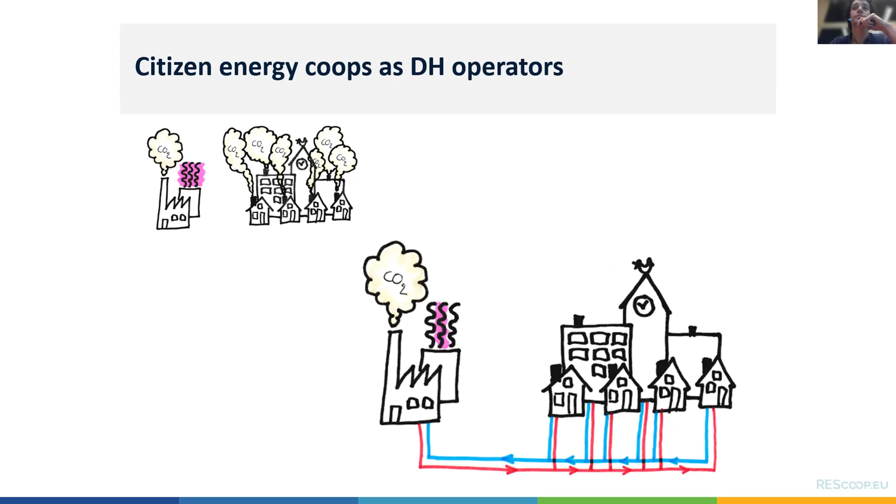I told you that there is this new cooperative, the Mobility Factory, and Partago, who developed an app to share an electric car, and this is European. So if you gather with some citizens in a neighborhood, you can be supported by the Mobility Factory to access this app, to access the services, and then to share an electric car with your neighbors.

And finally, I also told you that now some citizen energy cooperatives identify that at local level it's sometimes difficult to access funding, and so they are gathering to set up a new fund called MECISE. This is also a Horizon 2020 project, and the idea would be to access a 700 million euro fund to support the deployment of citizen energy cooperative projects. So we are really talking about a new paradigm. It's not a small movement, it's a European movement, and they are active in all the activities of the energy market, and they are developing tools to reach this objective.

So about the energy cooperative movement, I hope you understood that it's more a social concept. It's a way to organize. It's a way for citizens with public authorities and SMEs to reappropriate and own the electricity or the energy. It's a new way to collaborate, to cooperate instead of compete. And it's kind of neutral regarding the activity, because as you could see, there are citizen energy cooperatives active in all the activity sectors of the energy market.

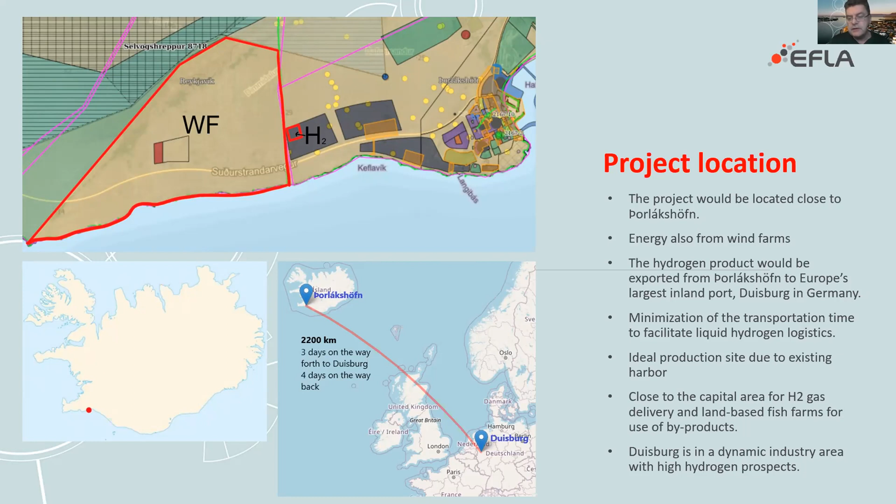And as you may see, that boat has to cross the North Atlantic, but also be able to go up the river. And that is especially of interest because hydrogen as a liquid material is not heavy. So the boat is not going deep down into the river. So we set up this scenario. We have the factory near to the harbor.

We produce hydrogen from electricity from the grid as well as from nearby wind parks, and we convert the hydrogen into liquid form and export it in containers, as I said. We have byproducts here from this factory. We have oxygen, of course, because we are producing a lot of oxygen. And the oxygen will go to the nearby fish farms.

And that is very interesting because in this area of Iceland, we see now big growth in land-based fish farms, salmon farms. And we have also the rest heat from the electrolyzers we could use to heat up the seawater up to the optimal temperature for the fish to grow.

And not less important, if we are producing hydrogen in a large scale, then we are also able to deliver hydrogen in form of gas to the capital city, Reykjavik. It's only 30 kilometers away. And so we could service fuel stations there with gas under pressure.

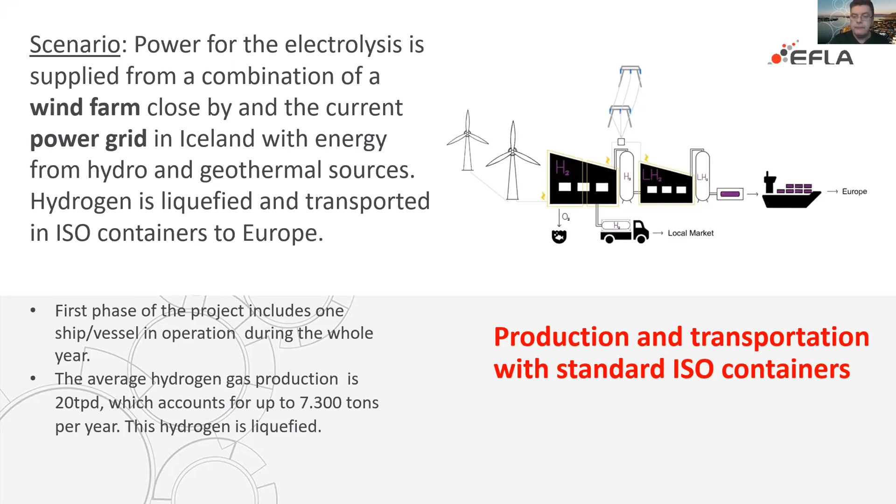So we know, of course, that it costs a lot of energy to turn hydrogen in gas form to a liquid form. And it is approximately 8.5 kilowatt hours per kilogram of hydrogen. But as I said before, the beauty is that a cubic meter of liquid hydrogen weighs only 71 kilos. And we know also from this project and other projects we have been working on that the economy of scale in this business is very important.

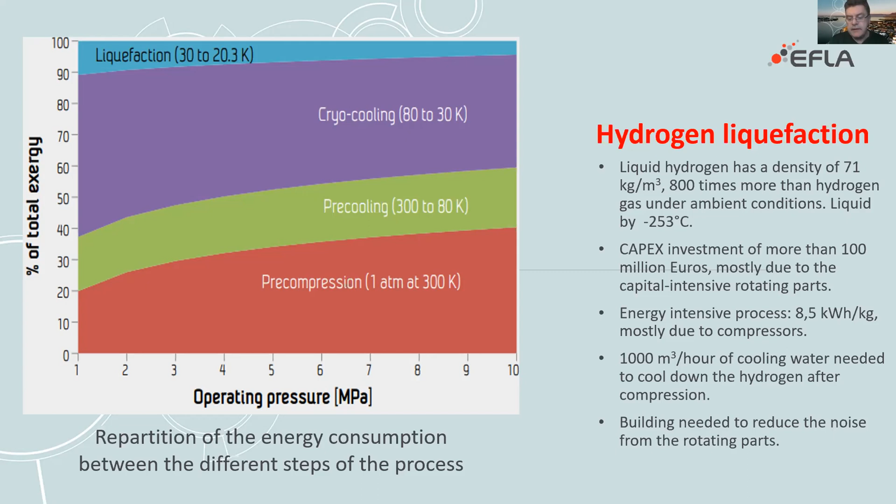So in this project, we decided to cooperate very closely with the US company Chart Industries. They are also active in Europe. And they are operating factories in Europe also for technical systems. And as I said, we use the standard ISO container produced by Chart Industries.

And we could put in 3.2 tons of liquid hydrogen per container, and the empty weight of such a container is around 13 tons. And the vessel could take 110 containers per delivery.

You can see those systems on those photos on the left side, the containers, the main production unit for the liquefaction on the photo in the middle, and land-based stationary storage tanks on the photo below that, tanks lying horizontally. And so the vessel will take full containers to the port of Duisburg. There, those containers will go to 3 off-takers.

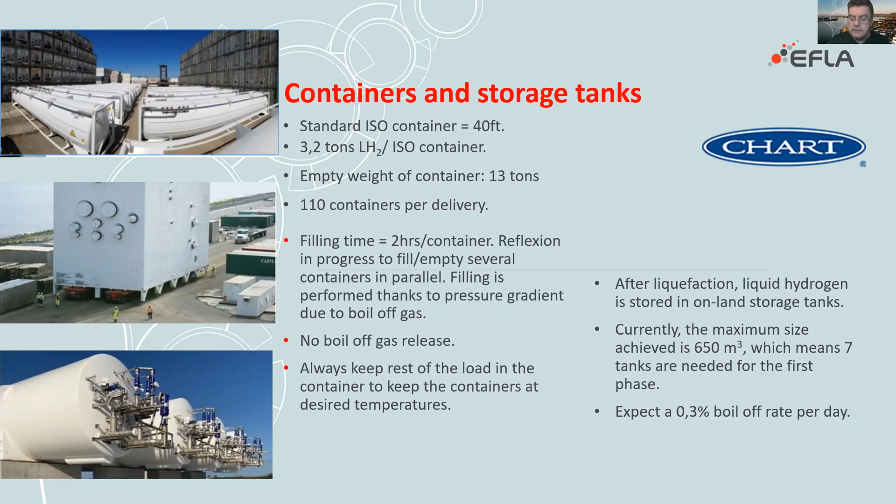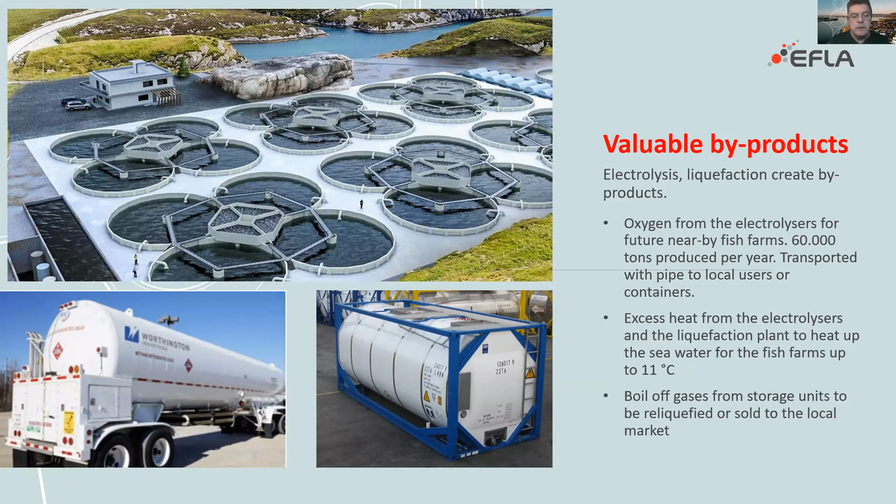As I said, the oxygen in liquid form or in a form of gas via pipeline will go to the nearby fish farms, and no boil-off gas will be released. So in this case, we calculate everything for 8 wind turbines, and the rest of the energy came from the grid. And we calculated this for alkaline and PEM electrolyzers, total yearly production of around 7,000 tons.

And it's very interesting to look at how much you can get for the byproducts if the market is going to behave like until now. So it's around 4.9 million euros per year. But if we take a look at the chart, you can see that the investment for the wind farm is approximately 19% of the total capex in this case. The hydrogen factory, around 20%.

Liquefaction plant, more than 100 million euros. And the transportation, logistic cost, the vessel is in this, and the containers, they are very expensive. It's around 26.6%.

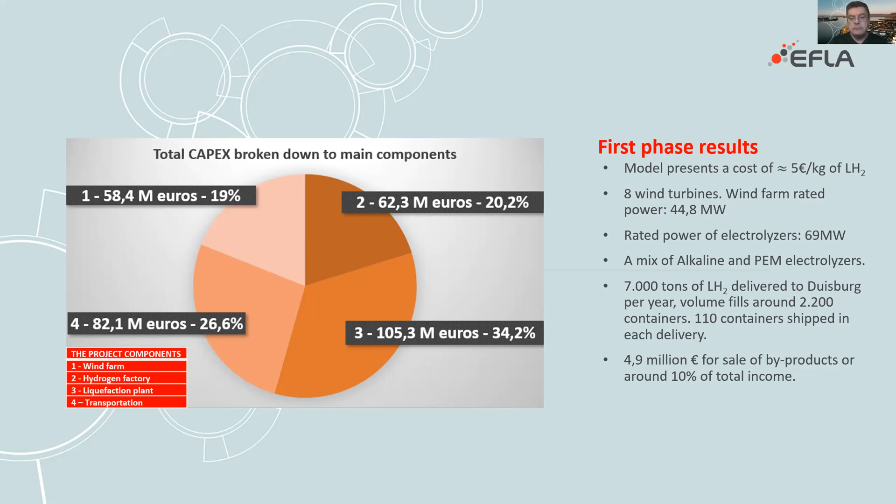So we have found out that those positions number 3 and 4 can be optimized, and we are now going to step into some kind of optimization of those two parts, and we do hope that we can take the price of the hydrogen very much down.

Here in Iceland, we have been working on a project called the Finnafjord project in the northeast of Iceland, where we are going to have a new industrial site, and here we will have large-scale hydrogen production in the future. There are even today companies looking into the Finnafjord site as the ideal site for this production, liquid hydrogen or ammonia.

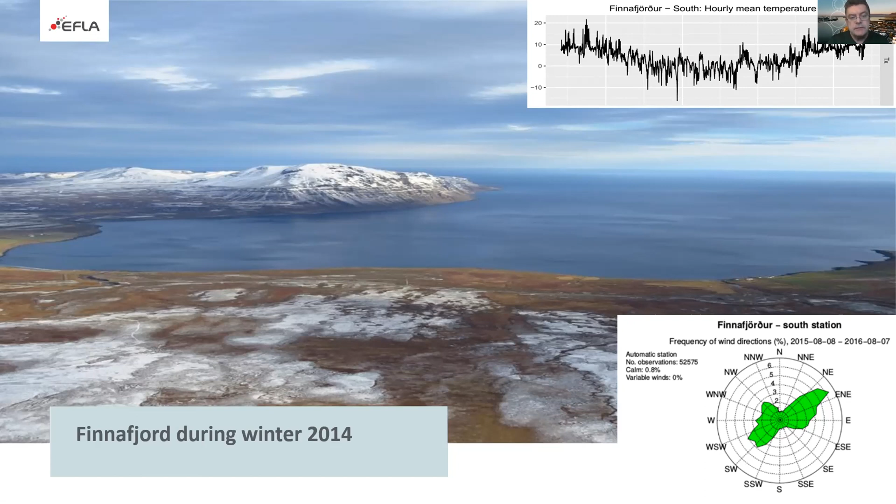It is flat land, no rock to blast. You can almost start your construction work at site, and the sea is deep, so port development is easy there. That is one of the points those companies we are discussing with are very much interested in regarding this site.

So if we conclude a little bit, we can see that this is really a business case. We have to face the fact that the technology is almost there, but not fully there.

For instance, this vessel I'm talking about - we cannot see a vessel of this kind on the seas today, but all the parts we need are developed. So there is a need for a special design of this vessel for this transportation. We also see that there is a need for a gigawatt plant to take the prices down, and the whole logistic chain must be optimized - the vessel itself, the tanks, etc.

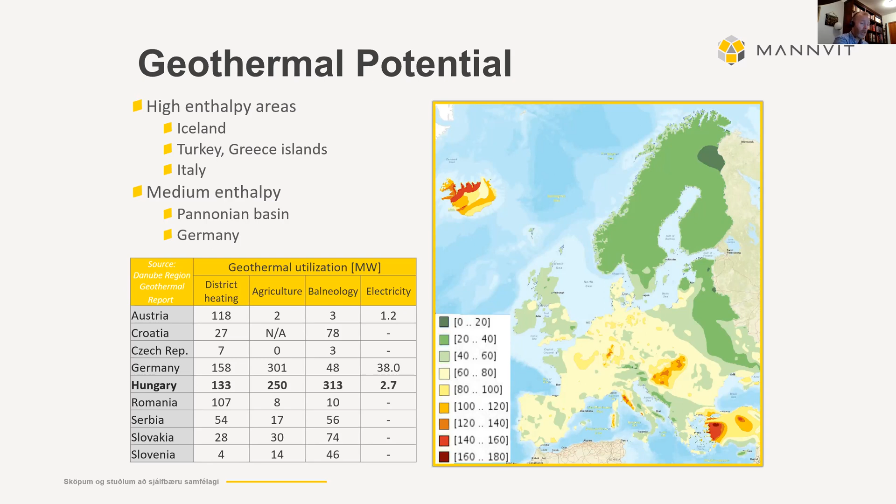Our company in Hungary was established in 2007. It started working on geothermal projects in Central and Eastern Europe, and also in general tried to access the green energy market in this area.

This area, the Balkans and Hungary, Romania - these areas have huge possibilities in producing energy in an environmentally friendly manner. In Hungary, they have the Pannonian Basin, which is a huge resource of energy underground, and also huge possibilities in solar energy. The Balkans have a huge possibility in hydropower, and also some possibilities in wind.

But the further you go to Croatia and in that direction, the less you have in possibilities for geothermal. But in many countries in this area, you have geothermal possibilities, although they are maybe on a bigger scale in Hungary, and also when you go further south, all the way to Greece and Turkey, there are also huge possibilities. We have developed this company to work in this area - just as an example of projects we have been working on.

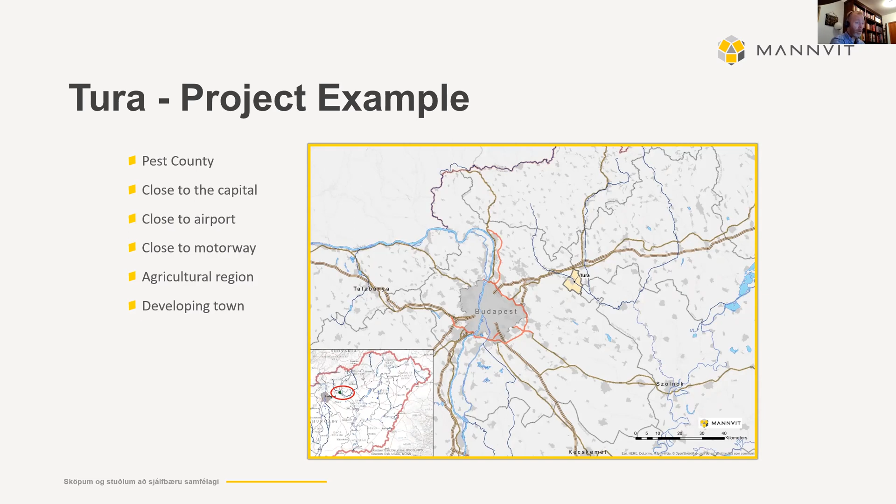It's a power plant that gets the geothermal fluid from wells, about 2,000 meter wells, with temperature around 120 to 130 degrees. This is put into turbines using the so-called ORC technique, with two steps of turbines, and the production of electricity is through these turbines, with the waste heat from electrical production used to heat houses in the area.

So the utilization of the energy in the ground in this case is optimum, we could say. It's both used - the higher temperature water is used for electricity production, but the lower end for heating houses. This is a good way of doing things. Then the fluid which comes from the houses is re-injected into the reservoir, so the rest heat which has not been utilized is put into the ground again.

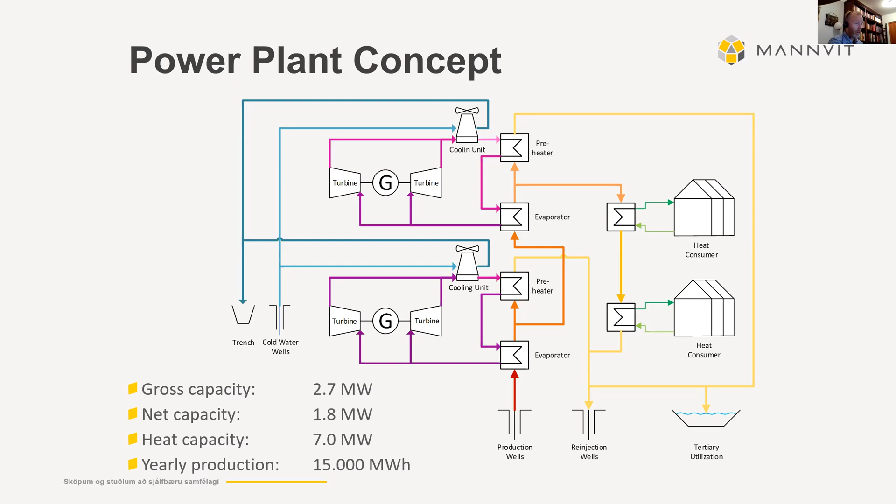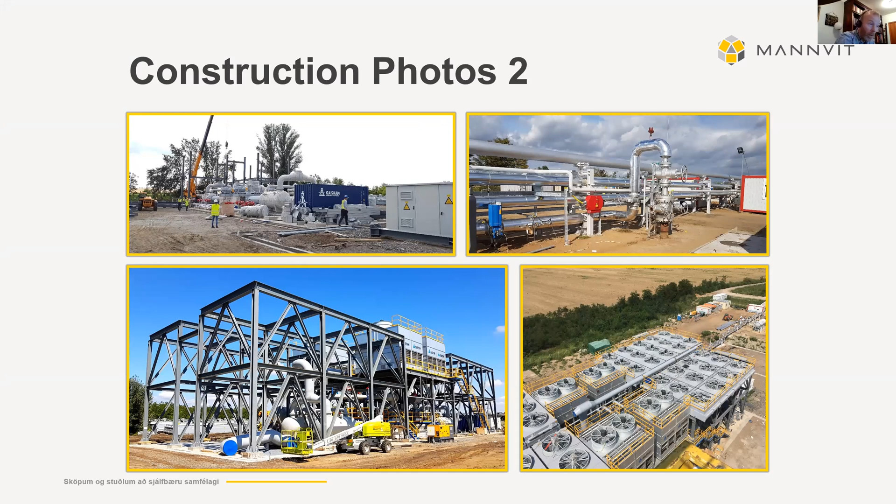These are just some pictures from the site when it was in construction, and this is the plant as it looks today. It's on a huge field that is mainly agricultural, and the factory doesn't take too much space - it's rather compact and connects well to the neighboring area. Although there's a large field, it's also near to consumers.

So it's a successful project, funded by private money, which has proved to be a good investment.

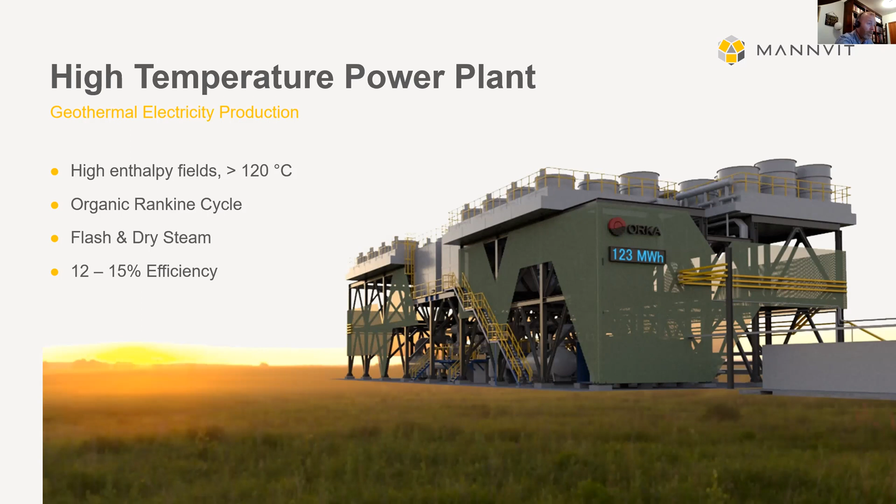We are also now working, in the early phases, on a project of heating Budapest by use of geothermal. Here we are using the experience in Reykjavik - as you may know, Reykjavik is more or less heated by geothermal. And there are huge possibilities in the Budapest area to use geothermal to a much greater extent.

Until recently, the authorities in and around Budapest have been very much against using geothermal for space heating. This is because the culture in the Budapest area and in Hungary in general is much related to spa use of geothermal, and there's a lot of tourism in Budapest relying on spas and some medical use of geothermal fluid.

But researchers and institutions have been investigating the possibilities of geothermal use in Budapest, and the result is that taking from the reservoir in the Budapest area will not affect the use of geothermal in the spa part, which they were afraid of. So this is a very promising project, and we hope it will be a good way to decarbonize and reduce pollution in Budapest.

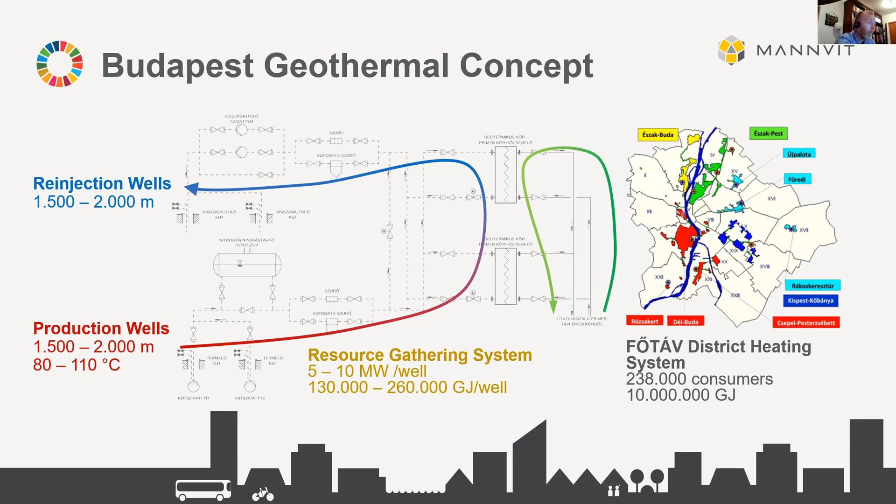There are also a lot of small municipalities that we have helped to utilize geothermal on a small scale, small villages, and we have been working in the area. There's also a project in Croatia similar to the Tura project, producing electricity and providing heat. So there's rising demand for our work in the geothermal business in Hungary.

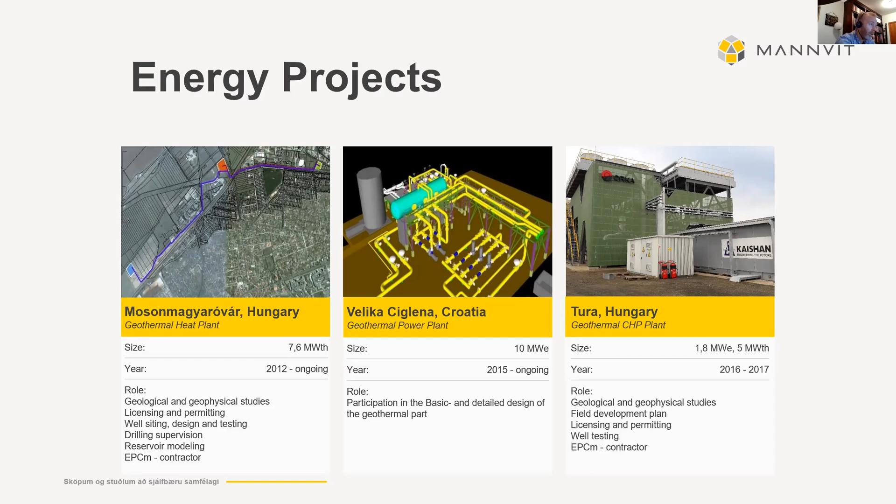People are beginning to realize that there is a lot of energy hidden underground which can be used in these areas. These are just some examples from other areas in Hungary which we have been utilizing, but mainly these installations are not for electricity production, only for generating heat for district heating.

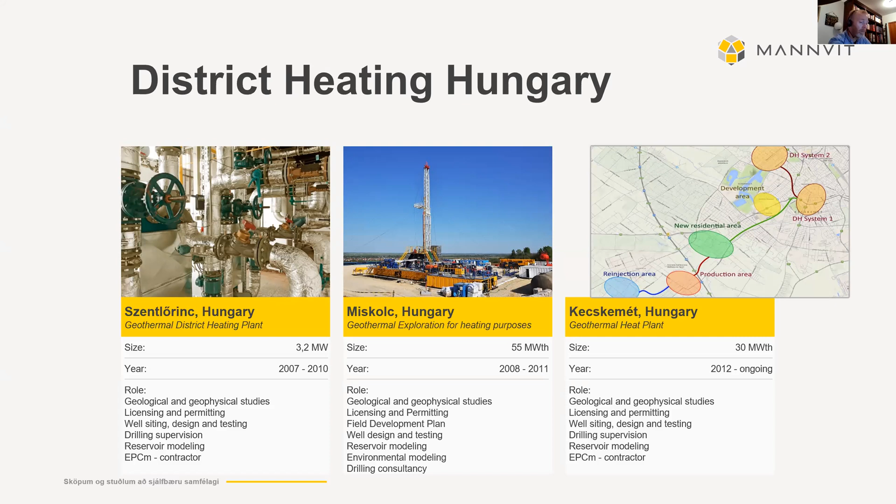We have also been working in the neighboring countries, but mainly doing feasibility studies or going through the possibilities that are in the geothermal sector in these areas.

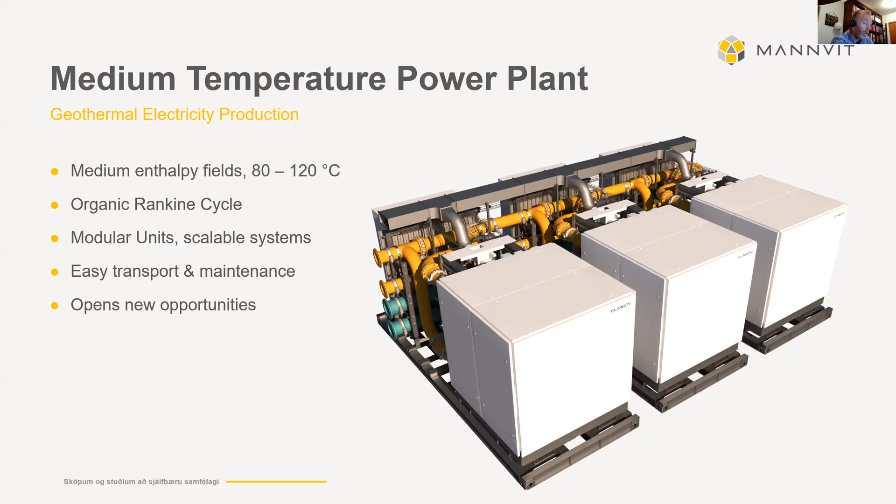We have also tried to introduce some technologies in cooperation with Swedish companies, introducing possibilities of producing electricity on a smaller scale where you have maybe an existing well, and you can get maybe 80 to 120 degree geothermal fluid up through the wells. Then there are smaller units that can maybe produce 150, 200 kilowatts, which can be installed rather easily. These units are also beginning to be used in Iceland.

As the ambassador for Europe was speaking earlier, there are a lot of challenges and difficulties that companies - small companies in Iceland, although Mannvit is a relatively big company in Iceland, with between 200 and 300 employees - face. It is a big challenge to go and try to convince municipalities, cities, or governments in other countries to start using geothermal resources.

Often in the beginning we start cooperation or get into contact with municipalities, companies, or partners in these areas through conferences like the ones we are at today, and from there we try to finance the first steps of investigations or measurements to see if there are possibilities within the areas. For this we use EFTA grants, the EEA grants, which are a kind of aid from the EFTA countries to help development in green energy in these areas, and we have also used some funding from NOPEF, which is a Nordic fund for marketing.

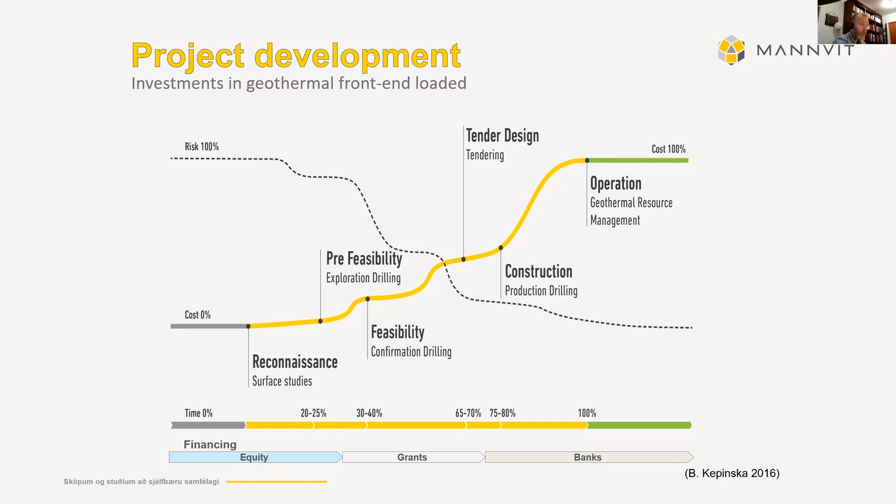We have actually been working in Romania for many years, and we have done a lot of studies and a lot of work especially in the western part of Romania and around Oradea and Timișoara. And now we have actually started two small power plants in this area, and it seems that the interest is beginning to be much more on geothermal. So it seems like we are going to be successful.

For example, in Oradea. Oradea is a city approximately the same size as Reykjavik, and resource-wise, it would be possible to heat all of the city with geothermal, but it's now heated with gas and coal in a very inefficient manner. So there are huge possibilities there, and this is also the case in many other places in Eastern Europe. But now, when the gas prices are getting higher, it becomes more interesting for these municipalities to go ahead with the projects.

Same goes in Slovakia, there are a lot of geothermal possibilities. We have been working in the Košice area, and we did a feasibility study there, which, when it came to the financing part, the financing institutions decided that it was too risky to go ahead with drillings. Same goes for a small town, Trebišov.

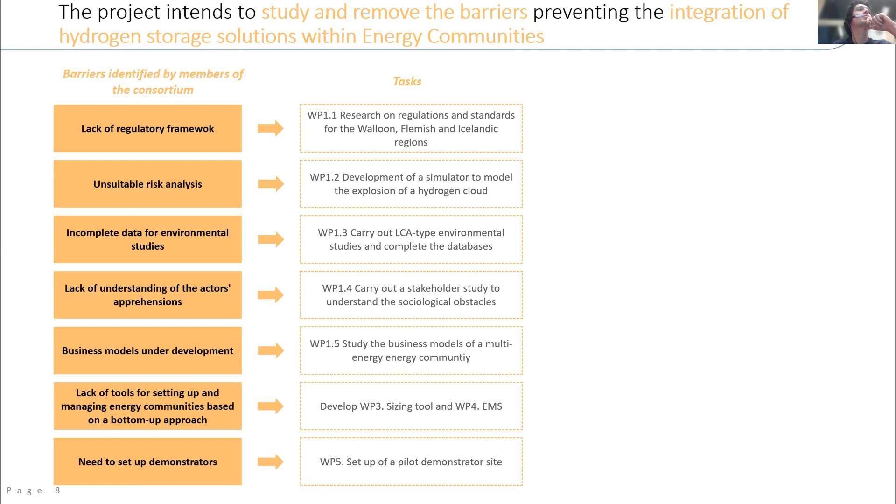And so here you have the member in charge if you want to see where the expertise lies in the project. And some members are in support to help the academic partners to develop their tasks. Okay, so we have identified all those barriers and we address these barriers with the tasks, but the idea is to set up real demonstrators. So we wanted to have real pilot sites, and there are 3 pilot sites.

There is the one in Iceland, the geothermal power station. And so the renewable energy is produced from the geothermal power plant, and the members of the perimeter of the energy community are the industry, the households, and the tertiary sector. Basically, it's the entire Reykjavik city and possibly the industry near the geothermal power plant. So it's a huge perimeter at the city level.

In Mortsel, it's a smaller scale perimeter. We are only at a neighborhood level, so it's a smaller project. The renewable energy is produced from solar, and the members of the perimeter are the tertiary sector. So basically on this site, this is a collection center. They receive some old clothes, some old equipment, and they are sorting it and reusing it. Okay, it's a circular economy plant.

And in Nivelles, this is also a smaller scale project. The renewable energy is produced from wind, because there is a wind park and we own part of this wind park, and from solar. And the members are households and also the tertiary sector, such as the hotel that you can see on this figure.

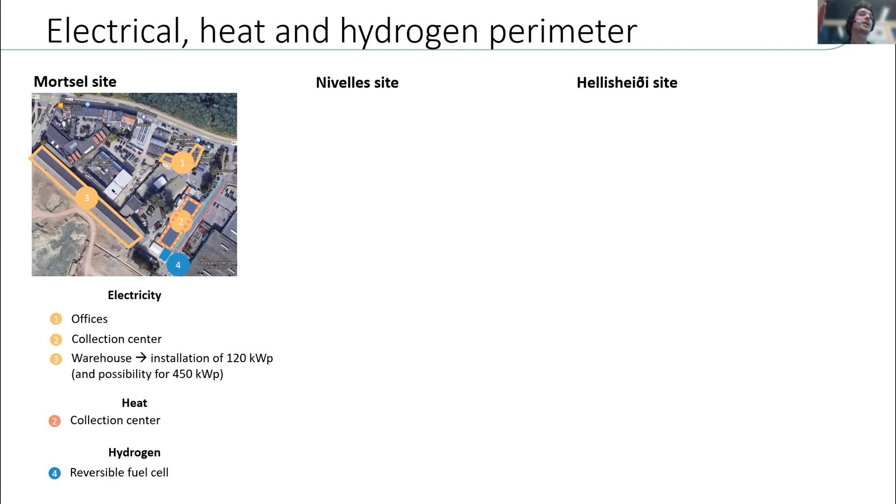And so it's the same. The idea is to locally balance and to avoid congestion. And we would also like to valorize the heat within the hotel, because a hotel is a huge consumer of heat. And so the idea would be to put the reversible fuel cell near the hotel. To give an idea, for the Mortsel site, the idea would be to install the reversible fuel cell in a couple of weeks, and in Nivelles, maybe at the end of 2022.

And the third site is Hellisheiði. So we have discussed geothermal power plants, so I assume you know a little bit more about this site, but there is the Hellisheiði geothermal power plant. The power is 300 megawatts, producing electricity for the industries, but also for Reykjavik city. Reykjavik city is the main consumer of this electricity. It's also producing heat, and there is a district heating network linking the geothermal power plant with the city.

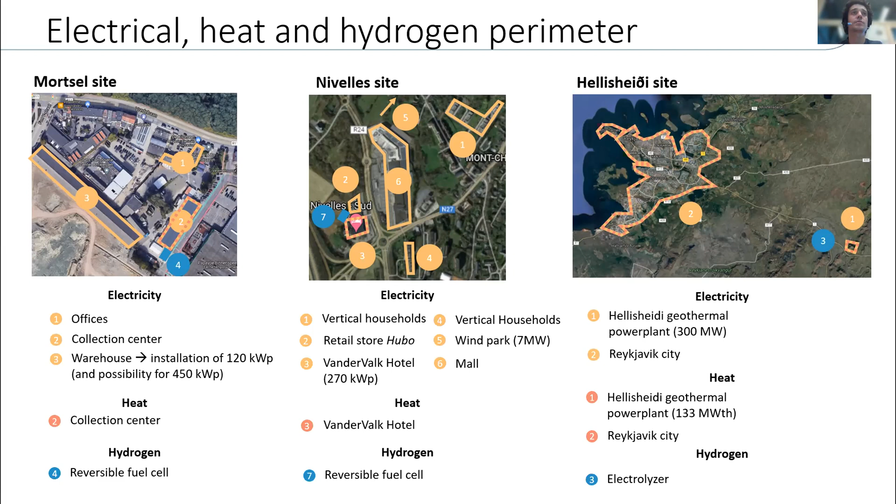So for the hydrogen production, to focus on the hydrogen part in Mortsel, the idea, as I've said, is really to apply hydrogen for constraint management and balancing. So really, when there is an excess of electricity, you produce hydrogen. The technology would be a PEM. And we assume it's a good technology, but it's a rather low temperature technology. Theoretically, the temperature should reach 80 degrees Celsius, but from the experience that we have so far, it reached 65. So it's difficult for the district heating application.

The electrolyzer mode would reach a power of 5 kilowatts, and in the fuel cell, so in the other direction, the electrolyzer is transforming electricity into hydrogen, and the fuel cell is transforming hydrogen back into electricity, it would also be 5 kilowatts. So you can see that the power is really undersized. We say that we want to install 450 kilowatt peak of PV, and so it's totally undersized.

But the idea is to have a demonstrator, to verify the efficiency, to validate the business model, to see how we can implement it, to see what the regulatory barriers will be, and also what kind of permitting procedure. In the geothermal presentation, we discussed the permitting barriers, and we assume that we'll have some also with the hydrogen. So it's a small one, but it's a demonstrator.

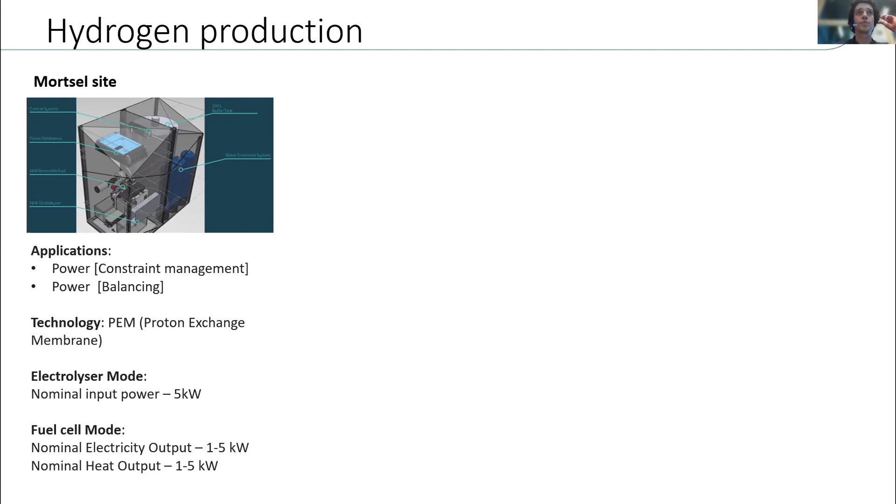In Nivelles, the application would be the same, constraint management and balancing, but we didn't decide yet what kind of technology. We would like to try a SOFC. So basically it can reach 800 degrees Celsius, so 10 times the temperature of the PEM, but it still needs to be defined.

And so indeed in Iceland, there are some reports considering exporting more than 170 terawatt hours per year, starting from 2050.

And to give an idea of this energy, it represents more than 2 times the entire electricity consumption of a country such as Belgium. So this is huge, and indeed it is a really good opportunity for Europe. And David is performing the different environmental analysis to ensure that this is environmentally positive.

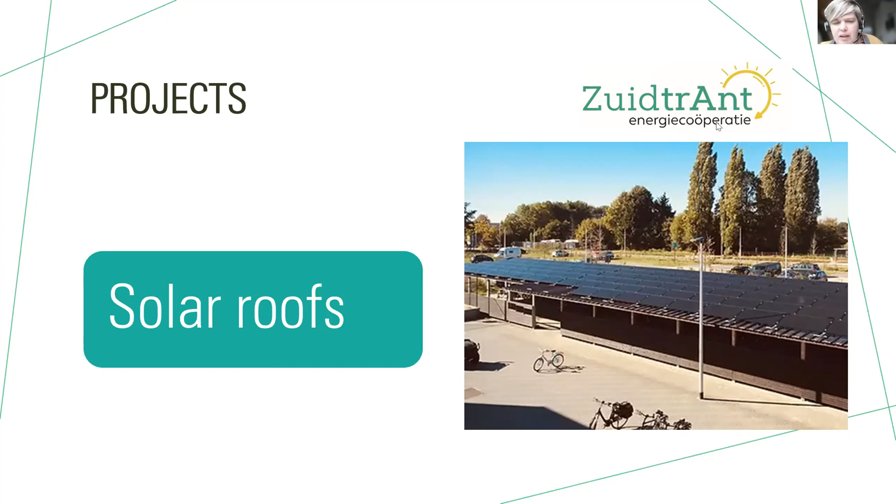What do we do with our energy cooperative? We place solar roofs, mostly on buildings of the municipalities in our region. We also try to motivate electric car sharing, and we try to fill the battery of the cars with our solar energy, and we do it with another cooperative, Partago. We assist energy renovations for private homes to look for less energy consumption in the households. And we also participate in innovative projects like the starting of energy communities and sharing energy.

We also participate in the H2 coop storage project, and we developed our own off-grid bicycle storage unit where the cargo bikes can be stored, and the solar can fill up the battery. A few numbers: today we have 630 members around the whole of Flanders. So it's not only our region, and we have 600,000 euros invested capital in our ZuidtrAnt cooperation. Like I said in the beginning, we have two cooperations, and the ZuidtrAnt with the W is the cooperation specially founded for renewable heating projects.

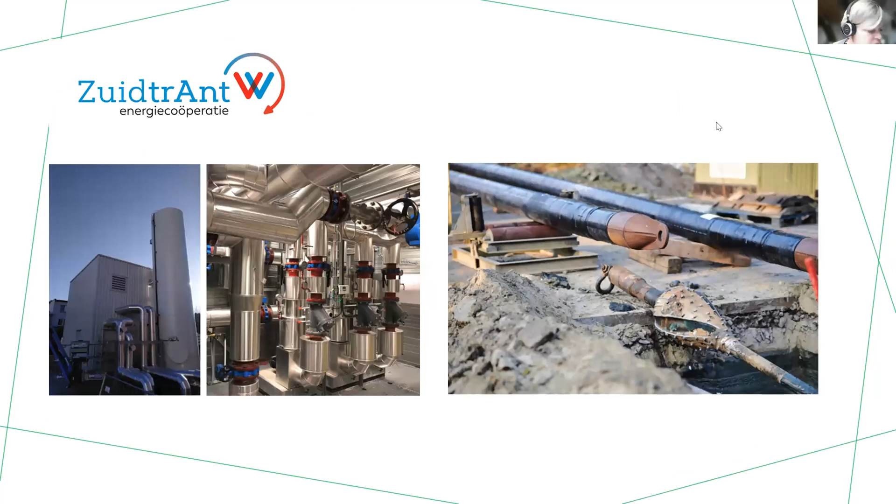This is a partnership between 3 like-minded companies, so we didn't do it ourselves. The investment of this project is 5.25 million euros. The investment is divided in the subsidy of Flanders, the bank loan, and the rest of the money we needed is cooperative money from citizens. On the next slide, you can see pictures of the distribution unit, and that unit distributes the heat from a production process from the industrial plant to the heat network. The heat network also crosses 2 big traffic roads and an elevated green buffer, and we had to do some pull drillings to pull the pipes in the right direction.

The numbers from ZuidtrAnt are a little bit different. We have less members, 300 members, but they invested more capital in our energy cooperative. So now I situated a little bit our 2 citizen cooperatives, and I wanted to close my presentation with a few recommendations or suggestions for Iceland. Like I said, I was amazed by the energy potential of your country. And in the near future, the shift towards renewables and the phasing out of fossil fuels will increase. It will increase also the importance of green hydrogen.